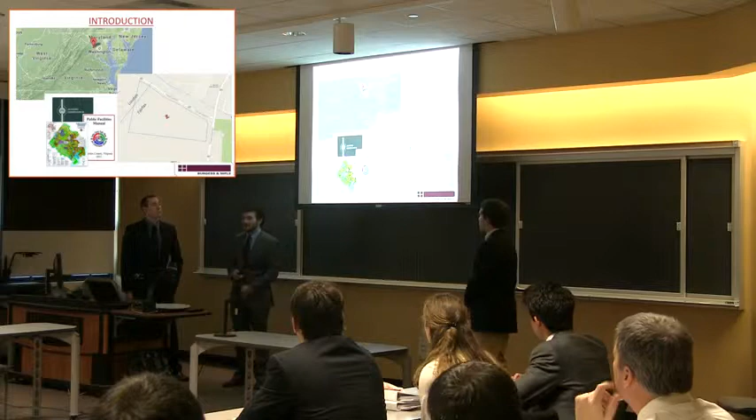We were working on a site located at 4350 Pleasant Valley Road in Fairfax County. It's located up near DC in the northern part of Virginia, separated by the Loudoun County and Fairfax County county line. We focused on not developing in that Loudoun County site to make sure we didn't cross over any regulations between the counties or zoning ordinances.

This is the comp plan land use map. We focused on making sure we stuck with the comp plan and made sure we were meeting the regulations and things they focused on in the comp plan.

The zoning ordinance - the site actually had to be rezoned and had to receive a special use permit. It was zoned residential conservation, which in Fairfax County looks to preserve the ecology, and it's roughly 5 to 10 acre lots. The special use permit was given because we're developing a church, roughly 33,000 square feet, and that falls under the special use permit as a place of worship. It will also have a nursery and future development of a playground.

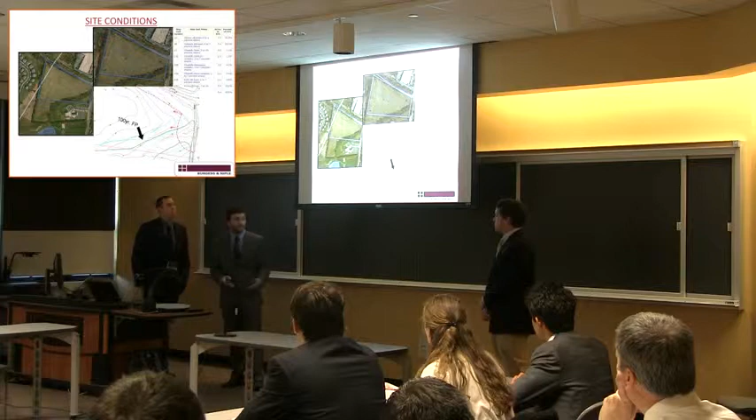We did our feasibility analysis. We used our wetlands delineation - there are no wetlands located on site. We also used our web soil survey - there are no protected farmland soils located on site. But we do have a 100-year floodplain on site, which we had to make sure we kept undeveloped to ensure the safety of the development and the preservation of the ecology.

For existing site conditions, we have existing water across the street, sewer across the street, and a connection to the public stormwater down at the northeast corner. We also have an environmental quality corridor that is to remain perpetually undisturbed, however you can put passive BMPs as well as unpaved trails through the EQC. We also have a resource protection area, which in this location is to preserve - it's in the Occoquan Reservoir watershed - the water quality and stormwater runoff.

So we start with our grading. We had to focus on the parking lot as that was going to be our biggest part of the development. The site is located on a ridge, so we focused on placing the parking lot in areas of low slopes to ensure less earthwork, as well as using that ridge to maintain our runoff for stormwater and minimize the cost for earthwork, since that is roughly 1/3 of our cost. The building plot was set at 268 feet.

We figured that 268 feet for our building plot elevation would best meet our stormwater runoff and grading plan to minimize costs for the parking lot. We also have our step off of 1 foot for the first 10 feet to ensure no water is going to be running towards the building.

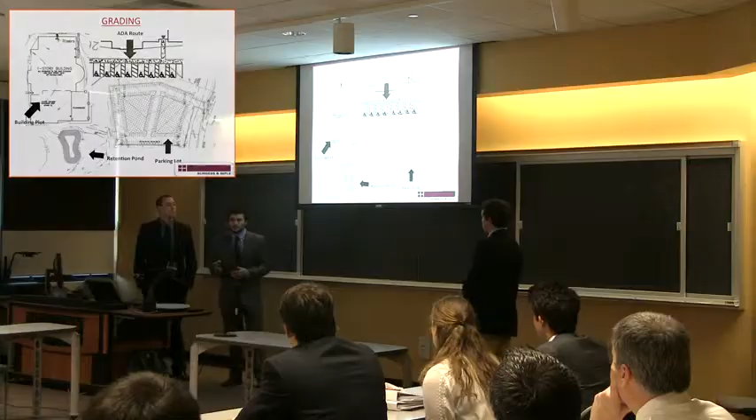And we're using a retention pond on site for our stormwater, and just moving that up - we initially had it lower than that. Once we moved it up to 264, we actually reduced our grading cost by $100,000. So it was pretty interesting to see how such a small thing can save your cost.

All right, so I'm here to talk to you about the wet utilities on site. As Greg was talking about, there was a water main connection through a 2-inch blow-off valve located right across from Blue Spring Road. That was connected and run with a 6-inch ductile iron pipe all the way to the building.

One of the fire code regulations is that a fire hydrant be within 50 feet of the building, so we placed that right across our egress access way, consisting of the fire hydrant itself and a 6-inch valve. Right before we got to the building, there's a 3-inch valve and a 1.5-inch water meter before the water is actually fed to the building.

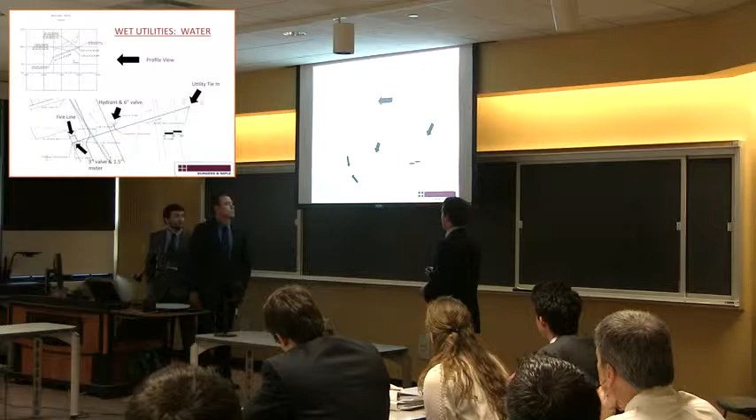Another fire regulation was that you need a fire line also going in a separate way, so we have that coming off right there. The connection was made at 253 feet in elevation at that point, and made the connection with the building at 259.

Now, the other wet utility is sanitary sewer. This was a little more complicated than the simple lateral line connected with water. It was an 8-inch PVC, and as you can see, we connected at 250 to this manhole that connected in with city sewage.

We had to encase that with a 24-inch corrugated metal pipe, in order to provide structural stability as it crossed the right-of-way right here, with the increased pressure of the road and vehicular traffic.

Once we got out, there was a clean out placed every 50 feet as per regulation. It crossed the stormwater pipe right here, and all clearances and covers were to code, and it ties into the building right in the very back.

Again, these are clean outs, not manholes, every 50 feet. We weren't allowed to put one in the access way, so the 50 feet regulation was just for the first stretch of the pipe.

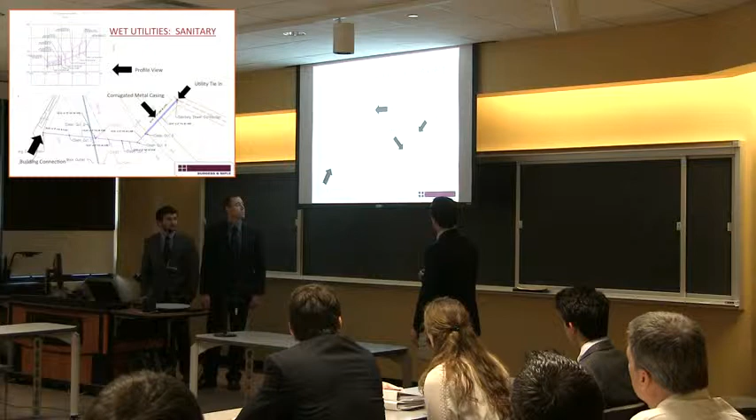Next, I'm going to talk about the stormwater management system we put in place, which comprised two main pipelines, both running from west to east, one on the northern border of the site, the other on the southern border. It consisted of 15-inch reinforced concrete pipes, inlets, grates on the two grates located here on the ground for the two islands, and a retention pond that Greg was talking to you about.

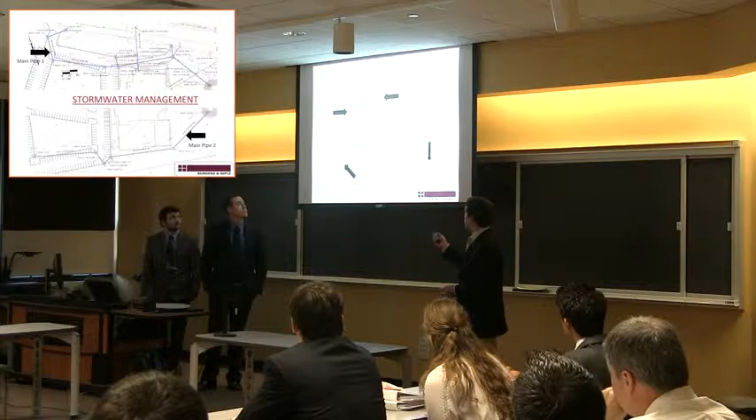The two outlets empty into the retention pond at an elevation of 254 feet. Because it is a retention pond, we wanted to keep a few feet of water in there at all times. So the outlet structure, the drainage structure here, which leads to the 36-inch reinforced concrete pipe that leads to the city's stormwater management system, is located at 254 feet above elevation.

Other than that, it's not the most complex system, but it provides the means to keep the peak discharge of our site adequate with the pre-development number. So it was a success.

For erosion and sediment control, we deployed basic methods including temporary stone entrance, silt fence, diversion dikes, sediment basin, as well as a retention pond.

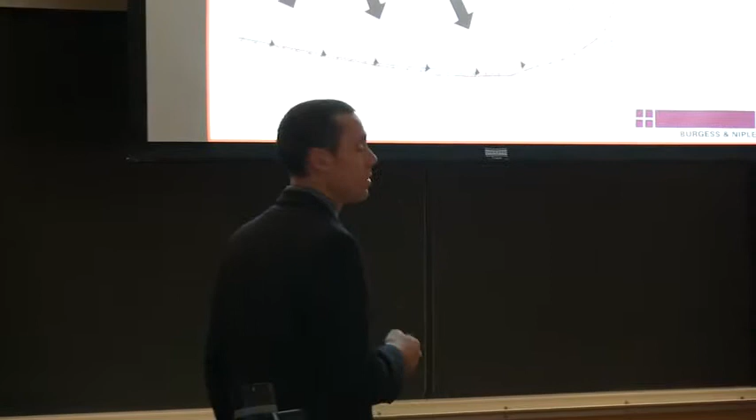For the flow path, it directs this way, and we have constructed a diversion dike here, called a right-of-way diversion dike, composed mainly of soil, but where it crosses our construction entrance, it's going to be made of stone, and we're going to have an entrance there that's also made of stone for easier crossing.

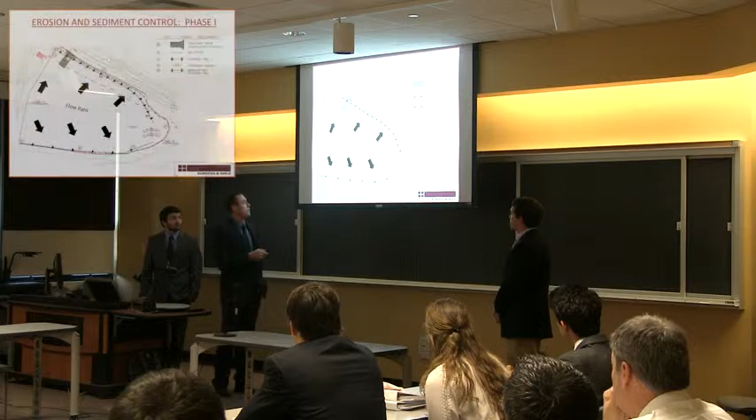We have a diversion dike down here to the south. Both are intended to route water over here to our sediment basin. A sediment basin was chosen over a sediment trap because of the increased area over here. This is a large construction area, and a sediment basin would handle more water than a sediment trap would.

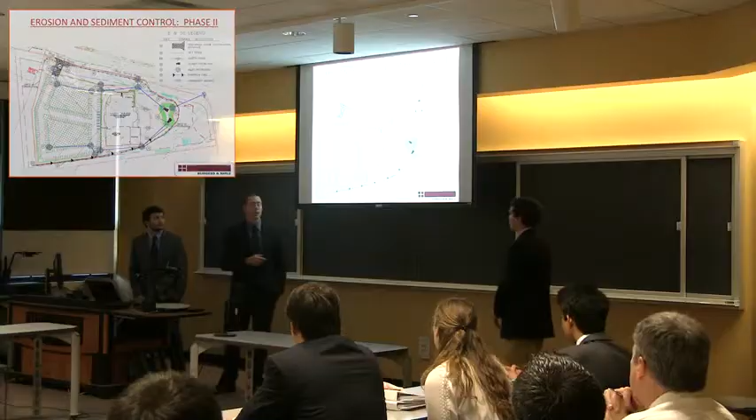Some of the methods used for the erosion sediment control phase 2 for our inlet structures: for our curb inlet structures, we're going to be using wire mesh and stone, and for our yard drain inlets, we're going to be using a fabric drop.

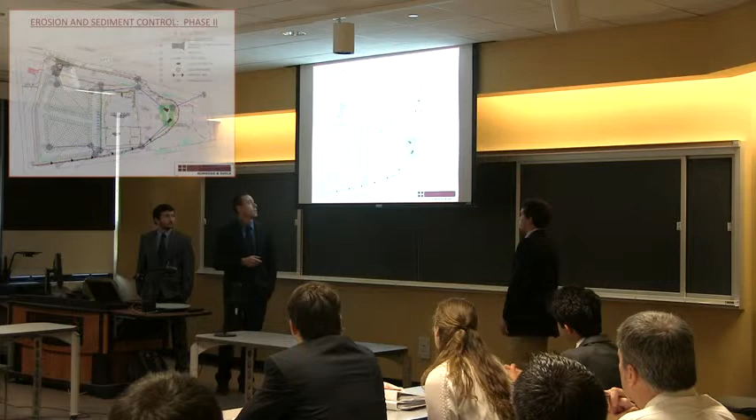Over here, you can see we've converted to our retention pond, which has outlet structure protection composed of riprap, which will help reduce the velocity of the water going into the pond. We have standard seeding right here, and that will also be between the building and the parking lot, as well as the parking lot and the diversion dike.

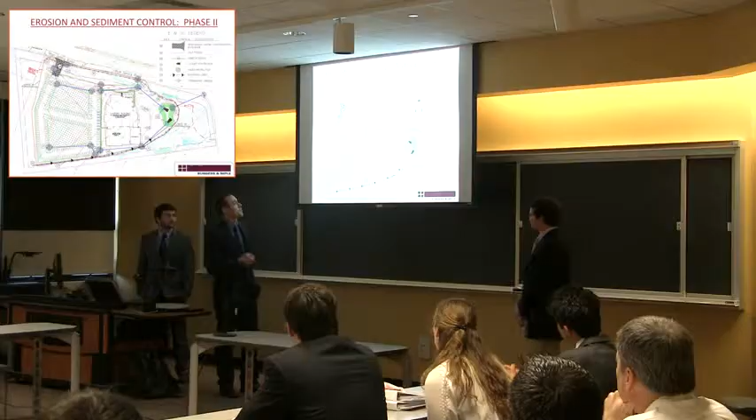For the cost estimate, we estimated it to be about $1.8 million.

We also came up with some cost reductions. Earthwork, we realized we could reduce it by $100,000 simply by reducing the earthwork by a half a foot. We came up with a second method, which would be removal of the islands, which would save about $10,000.

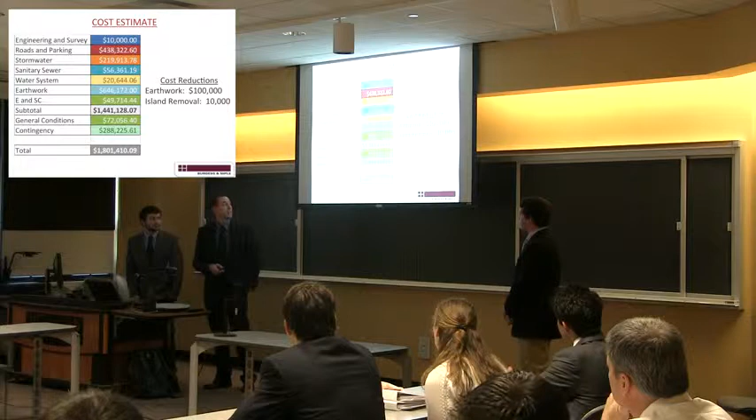We believe that this is an aesthetically pleasing and optimized plan, and that concludes our presentation.

Questions? Can't take it easy on the first group.

The layout of the parking field, yes, what's going on in the middle of those?

The islands, yes. They wanted to focus a lot on stormwater quality and reduce runoff, so we decided to put vegetated islands to provide an aesthetically pleasing area as well as reduce some of the impervious area within the parking lot.